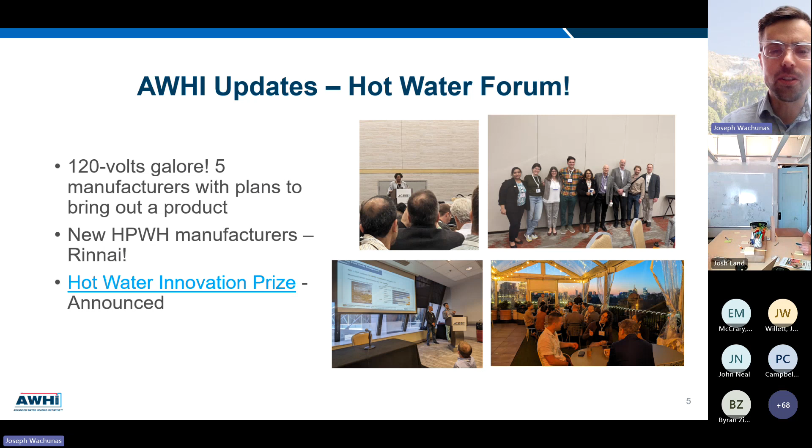Thanks, Paul. Well, other takeaways from Hot Water Forum, please put them in the chat. There was just so much learning and so much geeking out on water heaters and heat pump water heaters. Other announcements, we announced this at the Hot Water Forum, but also wanted to announce in the working group that the equity white paper, Increasing Equitable Access to Heat Pump Water Heaters, was released last week. And also the resource guide to the program, there's a QR code, and you can actually click on the link at the top to go to both of those documents.

This was the labor of love from so many organizations connected with AWHI to profile what are the top practices for increasing equitable access to heat pump water heaters. So thanks to all of you who participated in that, and please do check it out and share widely, and give us your feedback. Let us know what we missed and how we can improve.

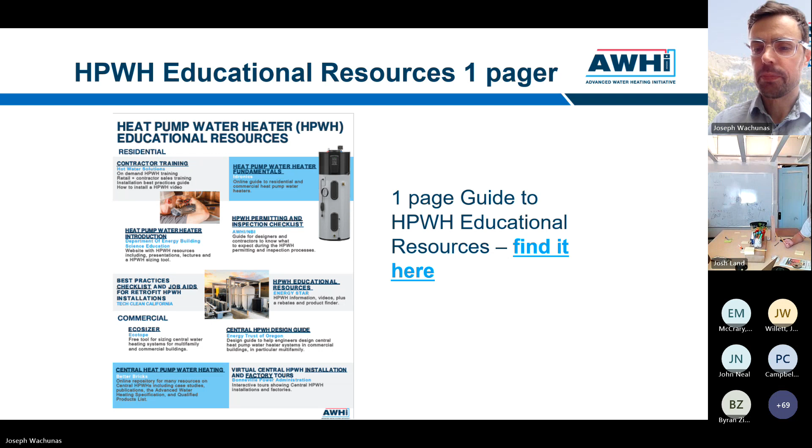Okay, two more updates. We announced this at the all stakeholders meeting as well, but hopefully many of you saw that the AHRI numbers that were just released in February show a widening gap between electric resistance water heaters and gas water heaters. The electric resistance water heaters hit their highest level in at least the last 20 years at 4.9 million water heaters sold. AHRI doesn't differentiate between electric resistance and heat pump water heaters, but hopefully that's an indication that the heat pump water heater numbers are increasing substantially as well. We'll find that out in September with Energy Star data. And we wrote a quick article on the topic in Clean Technica.

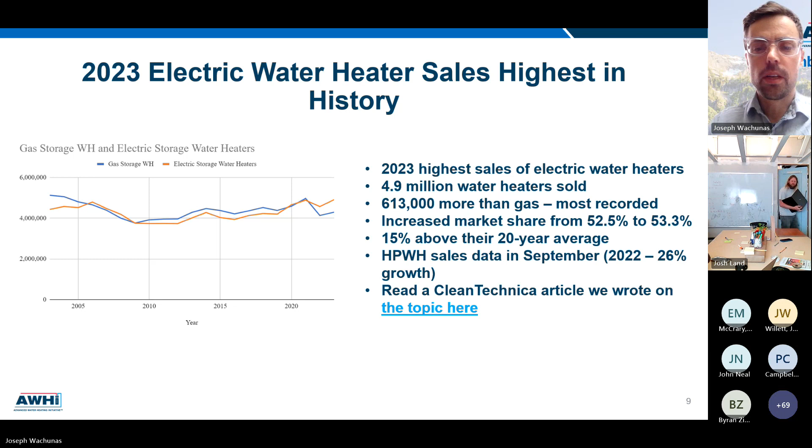And then finally, last announcement from AWHI, the upcoming webinars and roundtables. Don't miss our gas appliance pollution webinar this Thursday in partnership with Electrify Now. We're going to be hearing from Nancy Seidman from RAP and Sierra Club on this really important lever of air quality districts that are driving the adoption of heat pumps and heat pump water heaters. And then just announcing we're doing a low GWP refrigerants manufacturers roundtable with the CEDA program on April 18th. The link is there. We're going to be hearing from Trane as well as A.O. Smith on their work in refrigerants.

Okay, so I'll turn it over to Paul for some Energy Star updates. Go ahead, Paul. Oh, I see. I left our smiling friend Matt Reisinger's picture up on this page, so that's fine. It's a good reminder that that video is still out there and it's getting a lot of play and traction. So if you haven't seen it yet, I encourage you to go out to YouTube and look it up. Matt does a great job.

Just a couple of things. Energy Star was at the ACEEE Hot Air and Hot Water Forum last week. We got a lot of response. Nate Jutras from Energy Star presented on the technical resource manual's valuation for heat pump water heaters. Energy Star has a focus on looking at all the TRMs by state this year and understanding where there are opportunities to update savings calculations, cost effectiveness results, that a lot of utilities use then to create measures and programs for themselves. And if that data isn't accurate and up to date, many times those cost effectiveness calculations are not as positive as they could be, and sometimes results in utilities not launching programs.

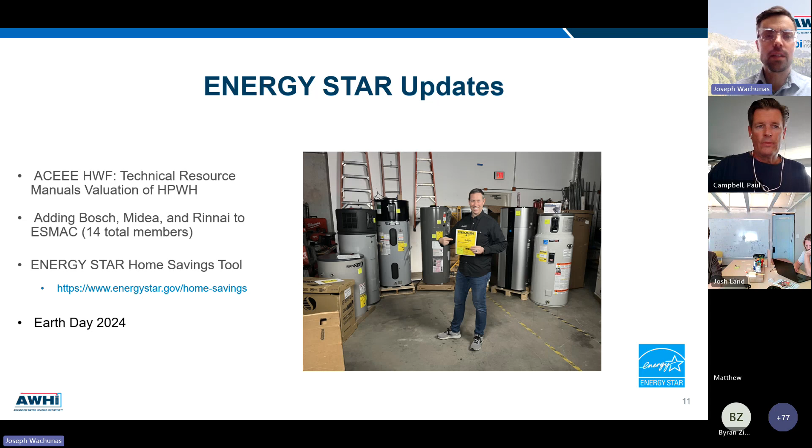Let's turn it over to heat pump water heaters with battery backup. We're lucky enough to be joined by Channing Street Copper Company. Many of us know them by their induction stoves with a battery backup. They're talking to us about a nascent project and looking for feedback, a nascent project on heat pump water heaters with a potential battery backup. So Channing Street Copper, great to have you all with us.

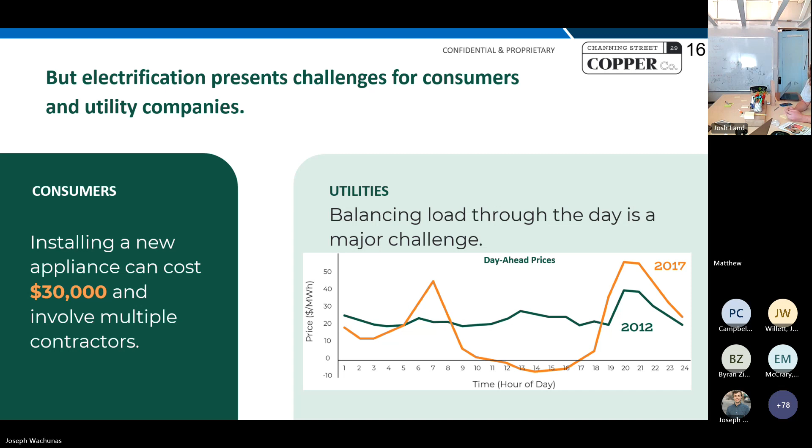All right, moving forward. So what we do with our stove so far, what makes this nice is that we make plugging into a 120 volt outlet possible. We're able to pull energy from the battery and the wall at the same time, so you don't have to have a 240 volt plug behind where your stove usually goes, in this case, water heaters. It cuts down a ton on installation costs, especially for retrofits, and makes it easy for utilities as well, as in load shifting and just avoiding full upgrades both to homes and to neighborhoods.

Let's see. So we're in the first few steps of building out our water heaters over here. Andrew's taking charge of that. A couple things we're looking at right now is just being able to have a quicker hot water recovery time. If you are cycling through a tank of hot water, we want to be able to come back and get more hot water more quickly.

So we are putting resistive elements into our water heater, along with the heat pump. That will help just pull power from the battery and dump it into the water a lot quicker if you're trying to go through a few different tanks in an afternoon. And it still enables the heat pump to operate off of 120. That's kind of the main plug there.

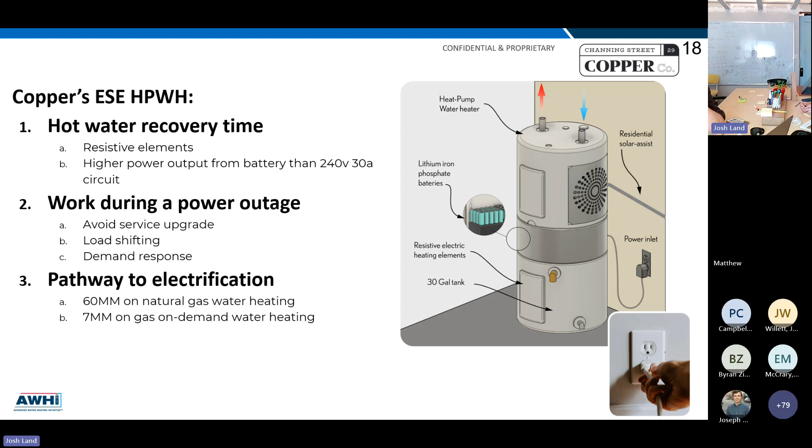This is something we're looking at. We are mostly looking for feedback from everybody here. You guys are a bunch of experts, and we're kind of new to this world. Wondering if in the next few minutes you have some comments, some questions, some advice, like what are some of the attributes that we should be focusing on in the development here.

We're new to this game. We've been making stoves for about 3 years now. We're feeling really good about that. We're in the manufacturing stage, and we feel confident in making induction stoves with batteries built in. But any feedback, any questions, any advice from the hot water specialists out there? What do you all think?

Hey, this is Don from BlocPower. How are you doing? Hey, Don, how's it going? Can you confirm? My understanding is the battery actually supplies the electric resistance, correct? The battery supplies the entire unit. So there is no connection between the wall and the actual water heater unit or any of its elements. That is entirely driven through the battery, and the battery is connected to the wall.

Okay, so the battery should, as a priority, supply the heat pump, right? Which is more efficient than the resistive heating. It'll be a bit of both. Ideally we'd be pulling from the battery whenever we can. If there's a time where the battery's gone low, we'll be pulling from the wall. And if there's a time that we can pull from both the battery and the wall at the same time, that's totally fine too. Depending on the time of day and the needs of the system, we'll adjust from there.

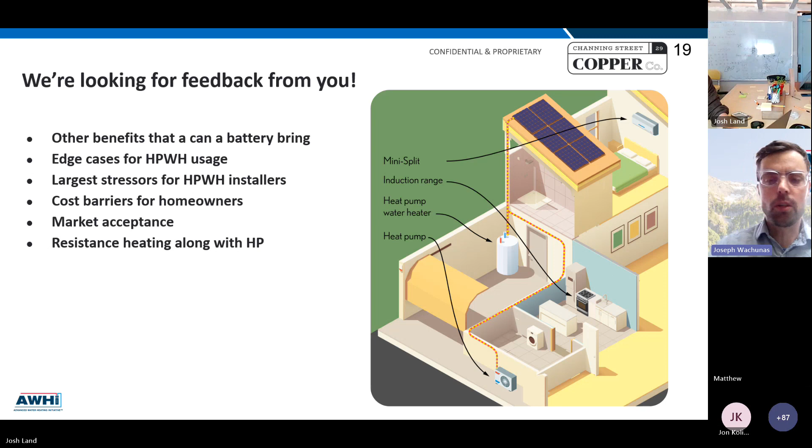Okay. Well, for the second half of the working group, we're going to switch gears a little bit and we'll go over to Elliot from Clayton Homes. Elliot's been gracious enough to come to our Home Builders Action Council meeting that we coordinate with Energy Star and really just update us on some really exciting stuff that Clayton is doing around decarbonization, electrification, and heat pump water heaters in particular. So, Elliot, thanks so much for being here today, and look forward to your presentation.

Great. I appreciate y'all having me and giving me a chance to talk about this awesome program we've been working on. So just to give a little background of Clayton Homes, we are the largest manufactured housing builder in the nation. A big focus of our whole business model and our approach to business in general is affordability. We know that the housing crisis in general is through the roof in this nation, and housing has never been more expensive, and it's never been a larger barrier to entry.

So with that, we look at not only the initial price of the home, but also at what we call the hidden mortgage, which is that utility bill. That's one of those guaranteed fees that you're going to have to be paying every month. A lot of times it's not really considered when you're looking at that mortgage payment. And what better way to attack that hidden mortgage utility cost than to be Energy Star or zero energy rated.

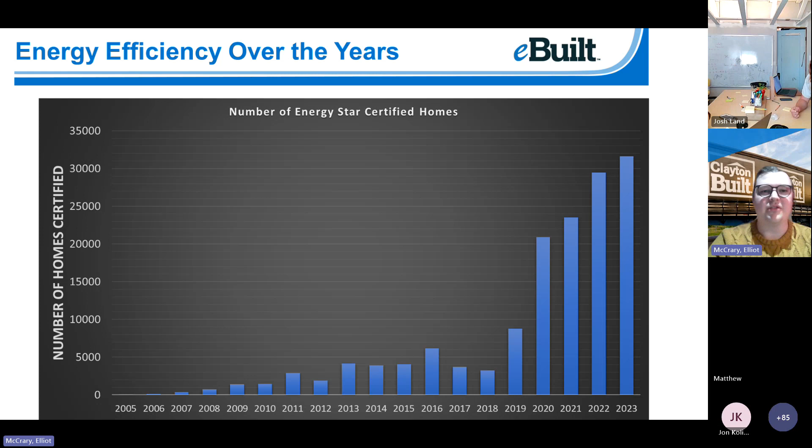So flipping into the slide here. So we came up with what we call the eBuilt program. eBuilt is basically our marketing term, meaning that the home is built to the Zero Energy Ready standard. So that's how we wrapped everything up in a bow so we can market it and put all our language behind that. We started in January of last year, and by the end of May of 2023, we had all 39 home building facilities certified. That was a huge undertaking. It was a big push by all of us to get it all there, and then we began full production of it on July 10th.

So between July 10 and the end of the year, we built over 15,000 Zero Energy Ready homes, and I believe that number now is up to 24,000 that we've built since we got certified, and it's sitting at 96% of our production right now. One of the things holding us back from going 100% is some markets are very heavily reliant on gas, which has made it more difficult to get certain appliances in there, and just the nature of some markets are less friendly to those kinds of changes, but something we hope to get to 100% over the next few years.

So again, coming back to the big way that we were able to accomplish this was that heat pump water heater. It has such a huge impact on the electricity use of the home, over the utility uses and everything like that. It significantly reduces the monthly cost for the homeowners.

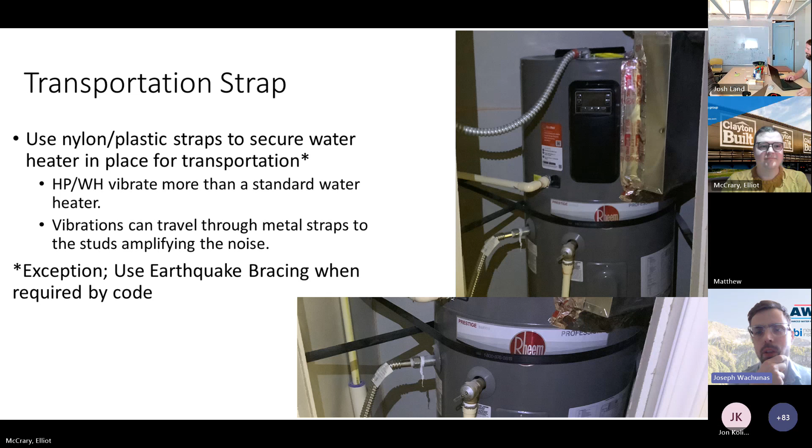Great, thanks so much, Elliot. Before we get to questions, I do just want to highlight to folks how exciting and incredible what Clayton is doing is. The 24,000 that Elliot mentioned that have been installed in under a year, compare that to the entire heat pump water heater market in 2022, which is the last year we have data, where 141,000 heat pump water heaters were shipped. So Elliot and Clayton getting into the game and going full speed into heat pump water heaters is huge. So thanks for that. Really excited.

So let's first go to Alyssa's question in the chat. She asked, what makes someone unable to switch from gas? Is it mostly electrical capacity issues on the property in the mobile home park? For that 4% who hasn't been able to switch yet, what's keeping them from it? Sure. So part of it is older communities that have limited electrical grid capacity. So for a lot of those we have to opt for the 15 amp version instead of the 30 amp of our typical heat pump water heater.

So really, for those situations, they're just trying to limit the amount of appliances that they have to put on their panel box in general. So that can kind of play into it, which again, it's kind of counterintuitive in the sense that they're trying to limit their electrical load, but they're opting for some less efficient equipment. But they've already got gas set up in that community to be able to handle it, things like

that. The other thing we've noticed is that in certain regions, gas has been incentivized by the municipalities and regulations. So historically, gas has been significantly cheaper, and certain areas particularly like to use gas a lot more, and they've incentivized it. So there are certain regulations in place that just lend themselves to more gas appliances being installed in that area.